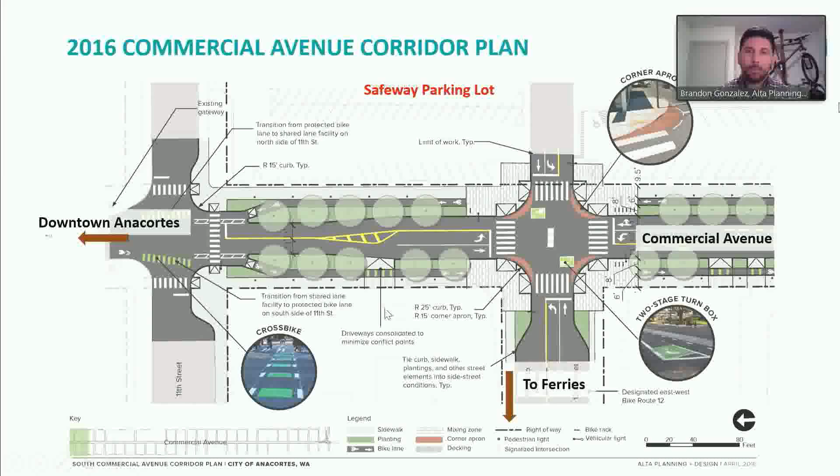As Tim mentioned, we weren't starting these decisions in a vacuum. This is just one segment from the 2016 plan — the preferred alternative approved at the time. Downtown Anacortes is directly to the left, and the street in the middle is 12th. You can see this was the conceptual alternative developed through a process of public input, looking at the right-of-way, evaluating alternatives, and thinking about traffic. It was never meant as engineering documents, but as a concept to be vetted through additional design — which is exactly what we're doing now. It's important to remember we're starting from this concept.

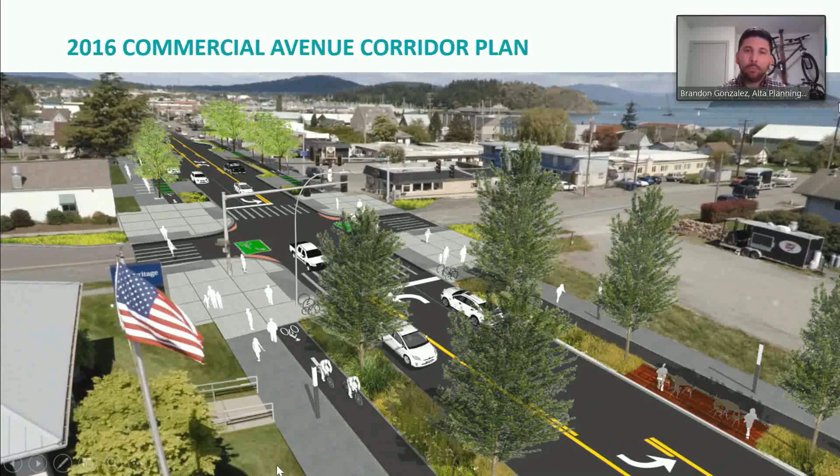The image we've seen a lot from that plan was a perspective of Commercial Avenue, showing vehicular lanes nicely separated from pedestrian and bicycle facilities, creating a safe and comfortable experience for people walking and biking. As Tim said, this is the first two or three blocks of what the corridor plan looked at, and it makes sense to start from the downtown area, extending that framework and great space just a few additional blocks. There are other things the city can think about for the future, like quick-build projects, to tie this segment into the rest of the corridor, with flexibility to implement pieces over time.

So let me go through some of the work we've completed over the past several months to give you an idea of what we've been up to. I'll go through the engagement themes in detail later, but we started with a December 6th open house in 2019 — it's crazy looking back after the past year to see everybody inside in a crowd without masks, a reminder of how much life has changed. We've also been doing business outreach.

We've had meetings with Safeway, and staff has had meetings with some of the other businesses around the corridor, and that will just be continuing and probably get even stronger over the next phase of the project. We've had a lot of one-on-one calls with residents and people who have called to ask questions and talk about the project, which has been great.

We launched an interactive web map to get people's thoughts on some existing conditions, barriers, and safety issues. That was done in March or so of last year, and we pulled that and integrated it into the virtual open house. The virtual open house has been our more recent thing that we've tackled.

We weren't able to do any in-person events for obvious reasons, so we did a second best, which was to get a lot of information on the virtual open house and get an opportunity to get feedback, which has been pretty great.

In addition to that public engagement, we've been working on and vetting a number of different alternatives. The concepts and things you see on the website - it's important for the public to really understand these are concepts. They're not quite engineering details. These are ideas we're thinking about so we can conduct the analysis on traffic, on impacts to safety, on impacts to congestion.

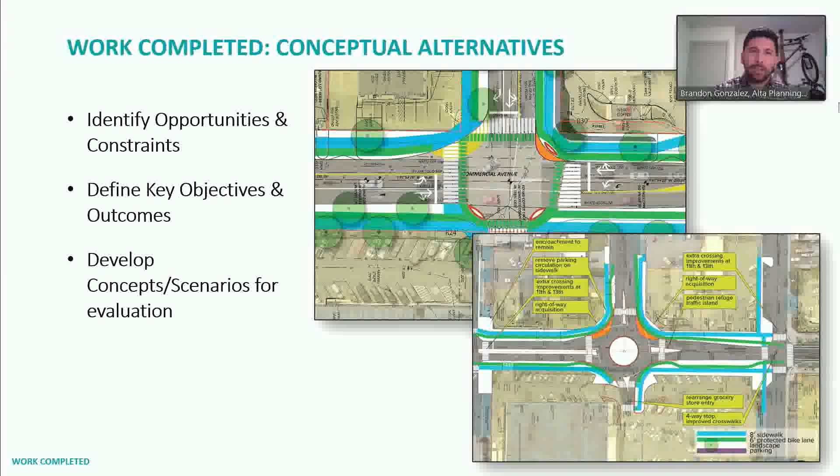Over the past year or so, we've developed a number of different concepts that we allowed our sub-consultant TSI to do a lot of great analysis on, which I'll speak to in a second. The whole purpose of creating these concepts is to start thinking about pros and cons and impacts. They're at a higher level, but in enough detail that allows us to dig into some of the analysis and figure out what their impacts might be.

In the mid part of 2020, TSI conducted a traffic impact analysis, or a TIA, that evaluated the 3 scenarios I'll walk through in just a second. A TIA really gets into a lot of the details of the design's impacts on traffic, congestion, queuing, safety, and freight traffic. There was a lot of different things that we looked at when we conducted the TIA.

Also more recently, in the second half of 2020, we submitted an intersection control evaluation, or an ICE, to WSDOT. That allows them to see where we're at, what are some of the concepts we're evaluating, and gives them the opportunity to weigh in on whether or not, if we went with a roundabout, or if we were to change the intersection control. It gives them the ability to give us a check on that and let us know their thoughts and whether or not they would allow it. So we're in the final stages of that process with WSDOT.

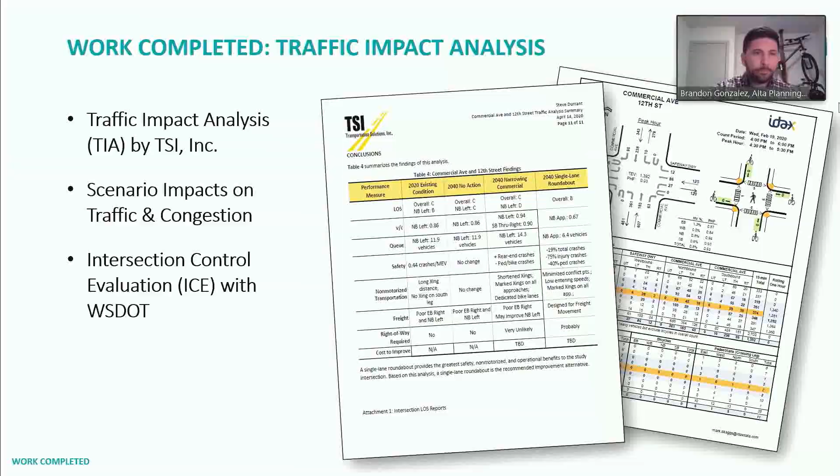On December 6th, 2019, we had the open house. Some of the main themes we heard from the open house were really traffic implications. I think that was probably the number one biggest thing we took away from the public - what is going to happen to the intersection regardless of any change we make on congestion and on traffic.

Trucking routes and trucking traffic was another really big topic that came up, not really specific to the project, but there was a lot of people talking about a holistic approach to truck routes in the city and trying to get trucks a little bit away from the downtown core in these areas. The Safeway entrance was a pretty hot topic also - should we close it, should we keep it open?

And if you remember at that meeting, we actually had a concept or design that showed the Safeway entrance being closed, just to start to get feedback from the public. A lot of people were really talking about the history of that and their feelings on the Safeway entrance.

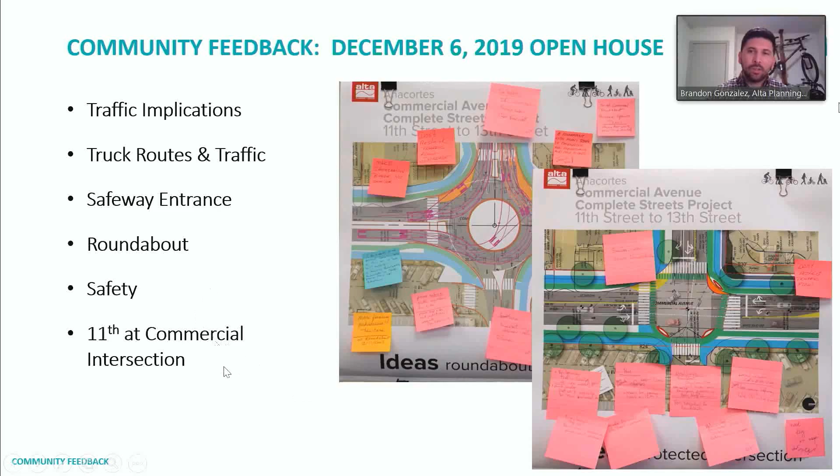So then the web map was launched for a couple of months and then integrated into our virtual open house. A couple of the main themes - by the way, anybody can go look at these comments. If you go to the virtual open house, click on show comments, and you can see these.

Just summarizing some of the main themes, a lot of safety concerns for people crossing 11th or 12th and Commercial. Most people were using other blocks to make that crossing and get over to the Tommy Thompson Trail. Again, the 11th and Commercial intersection has a lot of comments. If you go to the web map, a lot of people are really talking about the unsafe crossing or feeling of being unsafe as they cross through there or even driving through there.

It's not in our project area, but there were a lot of comments about Avenue Q, highlighting that if we get people across Commercial, the next step is getting them across Q to the Tommy Thompson Trail. And then generally with traffic speeds and traffic volumes, trying to do some traffic calming and feeling like we need to slow things down a little bit through here.

Something you should be proud of - I've worked on a lot of projects over the past 14 years, and I think this has probably been the project that's got the most, I don't know if intellectual is the right word, but very technical comments. A lot of people are really weighing in from a very technical perspective, which I think is pretty neat.

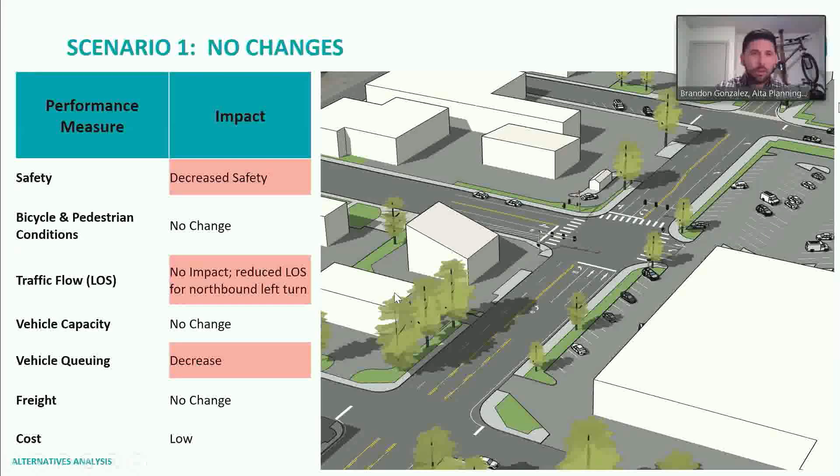So then we're going to scenario 2, which is the signalized intersection and roadway narrowing. With this concept, you can see we're starting to get into the approved alternative that came out of the 2016 plan. We have the separated bike and pedestrian facilities, and a few lane reductions near the Safeway entrance.

With those improvements, we see an increased safety for people biking and walking, but there's an increased risk of rear-end crashes based on the analysis, because of keeping the traditional intersection and also increasing the congestion and number of vehicles.

On traffic flow, thinking about level of service, there's not a significant impact for people driving through the intersection continuing into downtown, but there would be significant reductions for the northbound left turn going onto 12th Street. Vehicle queuing shows the same thing—that northbound left turn would have the most significant impact, an increasing function there. Not a significant impact on freight.

And then the cost we put as medium for this one, because there are obviously improvements going in, but they're not necessarily as high as the third option might be.

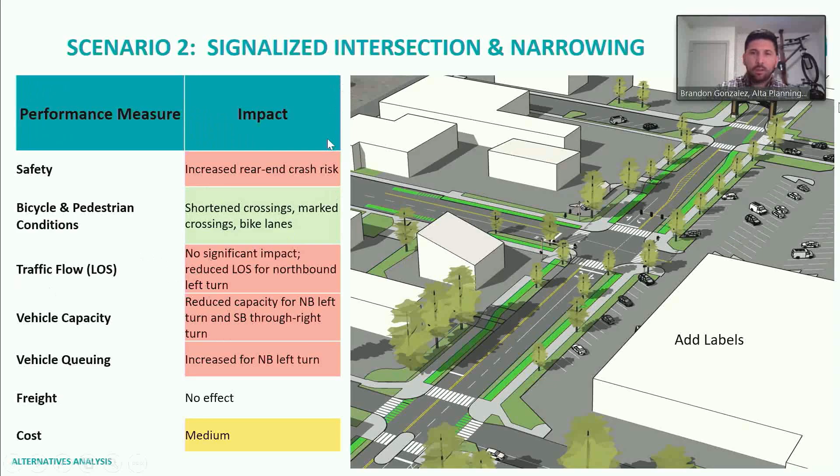So then moving into the third option, our third scenario, which is the roundabout. You can see here again we started with the 2016 plan and the concept showing the separated bike and pedestrian facilities, and then we inserted a roundabout at the location.

With the roundabout option, we do have improved safety for all modes and users. We know that roundabouts generally reduce traffic collisions, so from a vehicle perspective we would see a decreased likelihood of vehicle incidents. But we also have improved safety for people biking and walking—a lot of it has to do with creating widened sidewalks, adding separated bike and pedestrian facilities, and also, really importantly, slowing traffic speeds through here.

Traffic flow, we know that because of the continuous flow of vehicles through a roundabout, traffic flow generally increases when one is installed. At this particular location, given the importance of traffic mitigation and congestion, I think that's an important consideration. Vehicle capacity is also increased, again, due to the continuous movement of vehicles through the roundabout itself.

And then the same thing with vehicle queuing. That continuous movement really does have a lot of positive impacts on traffic flow, and vehicle queuing is no exception. And for freight traffic in particular, the ultimate roundabout would be designed specifically to accommodate freight traffic, just to clarify that.

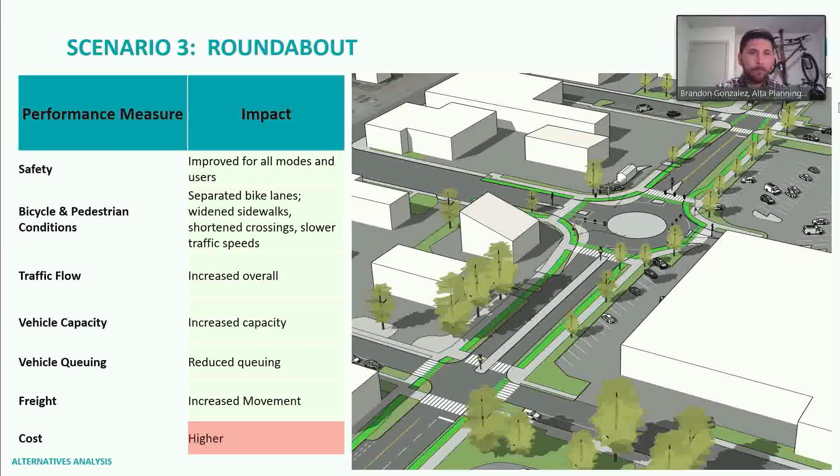So just to give you a little bit of an overview without going into the details of all three, you can see where those sort of stack up between the three different scenarios that we were looking at for the traffic impact analysis. And there are clearly a lot of benefits that the roundabout option provides for the intersection.

That's not to say that there aren't certain challenges that still have to be dealt with for the roundabout, and I'm not trying to make the picture seem overly rosy. There's definitely some challenges and design themes we need to think about. But if we're thinking predominantly from a traffic perspective and traffic flow, the research and the TIA shows that we would expect improvements for traffic flow, congestion, and level of service. And a lot of those also help create a safer experience for people biking and walking.

Brandon, Mayor. Yes, sir. Can I ask a question of Brandon, just a quick one?

Yes, go ahead. Just from the modeling standpoint, does the model incorporate into its algorithm or analysis the increased traffic that may be traveling to the San Juan Islands using the ferry system? You know, it's a hot destination, and I think we were up to 2 million people. So if that trend continues, that means it's going to be a lot more traffic taking this route to go to the San Juan Islands for whatever reason.

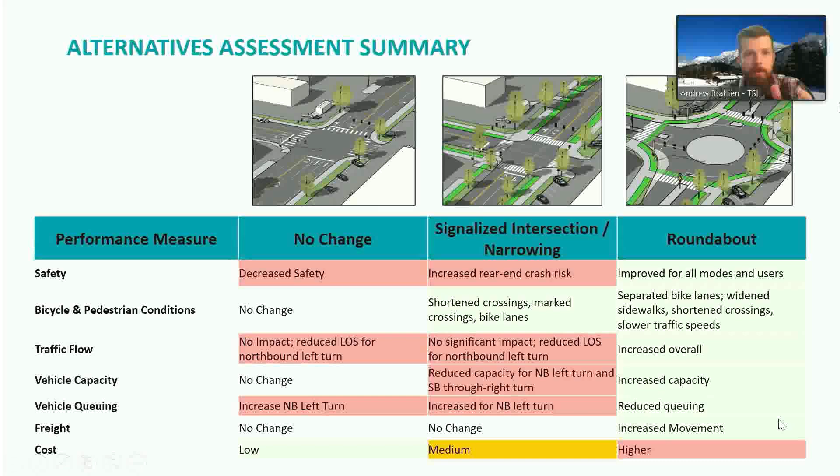Right, so getting to the final piece, which is recommendation and the next steps of the project. Based on public feedback, discussions, and the evaluation we've been doing on a number of different concepts, thinking about the core of the project because of grant funding, is really on improving bike ped conditions through the area. But also knowing that this is a major intersection for the community, a very busy intersection, we also have to take congestion and traffic impacts very seriously. Based on a lot of the analysis completed, we recommend moving forward with the roundabout design as our preferred alternative.

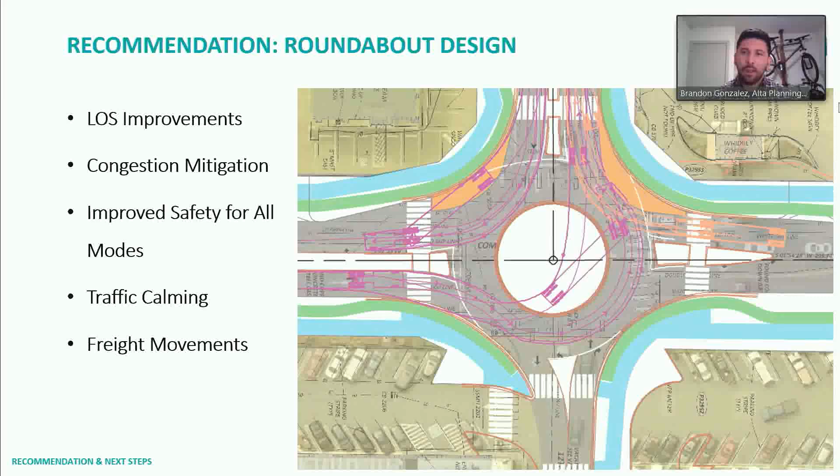What that essentially means for us as the project team is, like Tim alluded to, the past year we've been looking at the high level conceptual design and doing a lot of the analysis. But we really now have to start diving into the details because there's going to be a lot of questions as we get into the engineering details. There's a lot of things we still need to answer and great conversations that still need to happen with the public and with council. But the recommendation gives us the ability to continue moving forward into that next phase of engineering design.

The overall next steps, contingent on when we get to that next step, generally what we're looking to do is begin preliminary design next month. Then we're going through a lot of those details and figuring out what this actually looks like. Probably by May or June is when we'd have a pretty good idea of what that engineering design looks like, getting to that 30% to 60% level. Then we finalize the PSE package later this year with the final engineering design and construction documents.

We had a bit of an ambitious goal that we're trying to target, which would be to go to bid later this year, that November timeline. The really good thing about making that happen is we'd be really competitive with trying to get bids for the project, so there's an advantage for the city to get a lower price for that contract.

Mayor? Yes, go ahead, Carolyn. Thank you, I have a question about our grant funding. What do we know? Is there a deadline for when that needs to be used?

I'll take that. Carolyn, in preparation for this I was actually just looking at the grant funding for both those grants, and although it feels like this project's been delayed by COVID and our lack of public meetings, actually we're right on target. We told both grant agencies we'd be looking to construct this project in the spring of 2022. This timeline hits right what we had committed. If we had not lost multiple months over the last year, we probably could have exceeded that. Grant agencies love it when you can spend the money sooner, they like to see their money spent, funny people. But we're right on target for what we promised them.